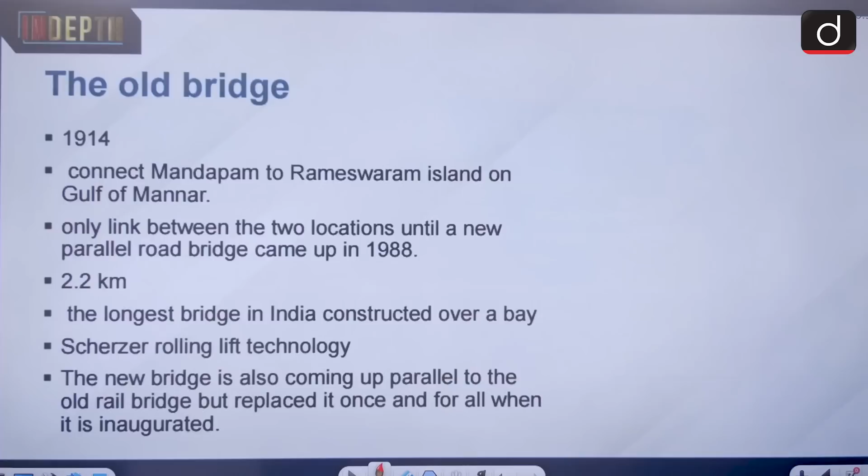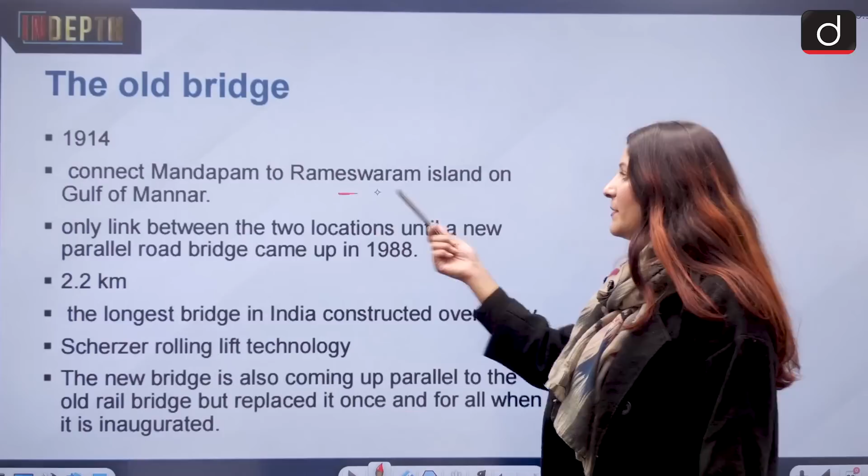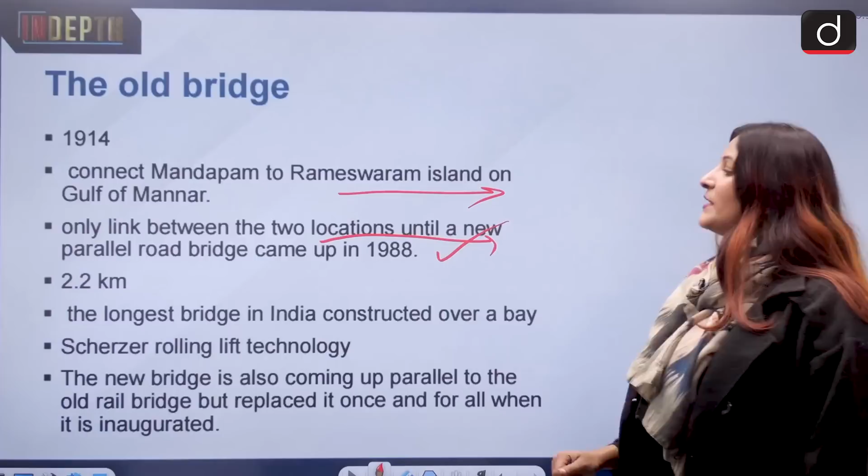The old bridge was established in 1914, so it is more than 100 years old, going to complete 110 years soon. It was constructed by the British to connect Mandapam to Rameswaram Island on the Gulf of Mannar, and it was the only link between the two locations until a new parallel road was built in 1988. It is a 2.2 kilometer long bridge, and it is the longest bridge in India constructed over a bay.

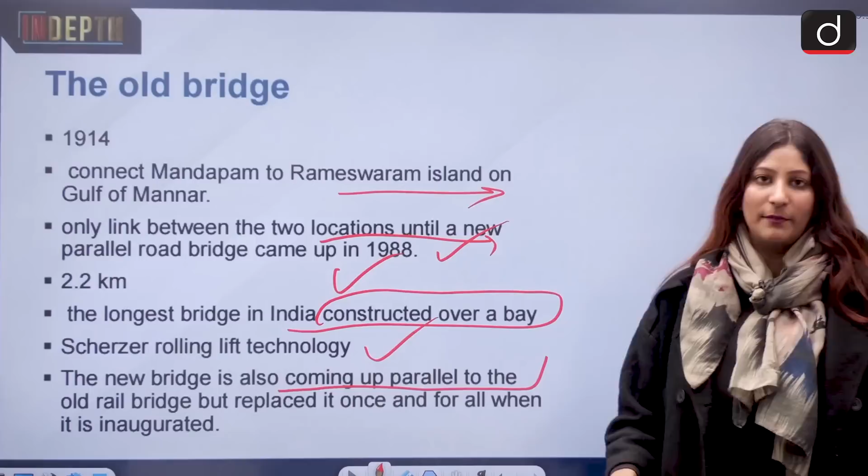So this is a prelims fact. It used to work on the Scherzer rolling lift technology, meaning it used to open up horizontally whenever a vehicle had to pass. The new bridge is also coming up parallel to the old bridge, but once it is fully formed, the old one will be replaced. We do not want any sort of accidents.

This bridge is important because it is India's first vertical lift railway sea bridge. It will move vertically, not horizontally. It works on the electromechanical system, with the mechanics working on electricity, and it will be 2.07 kilometers long.

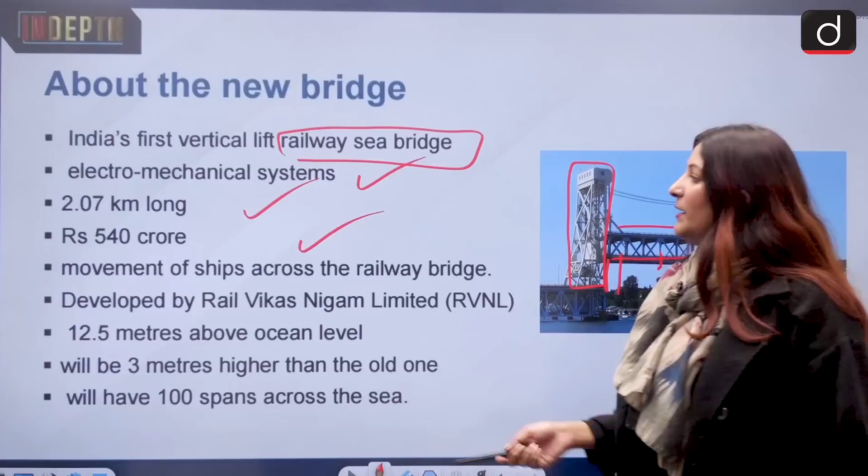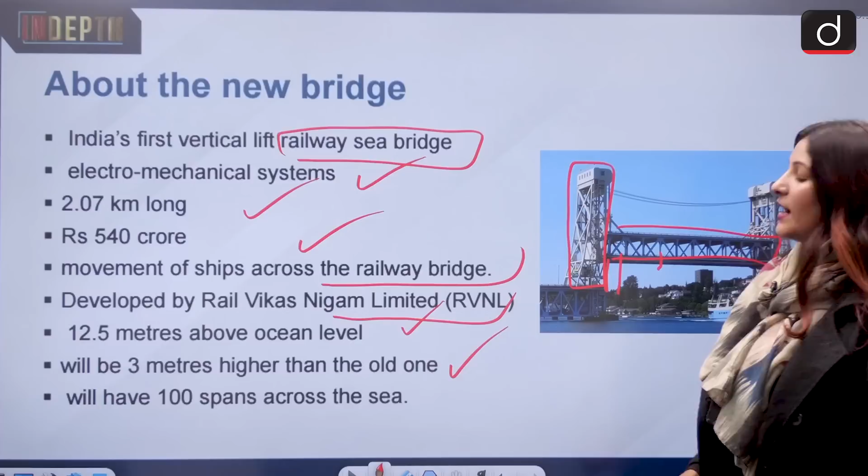The estimated cost was around 250 to 280 crores, but now the cost is 540 crore. The movement of ships will happen across the railway bridge, and it is developed by the Rail Vikas Nigam Limited. It is 12.5 meters above ocean level, 3 meters higher than the older one, and it will have 100 spans across the sea.

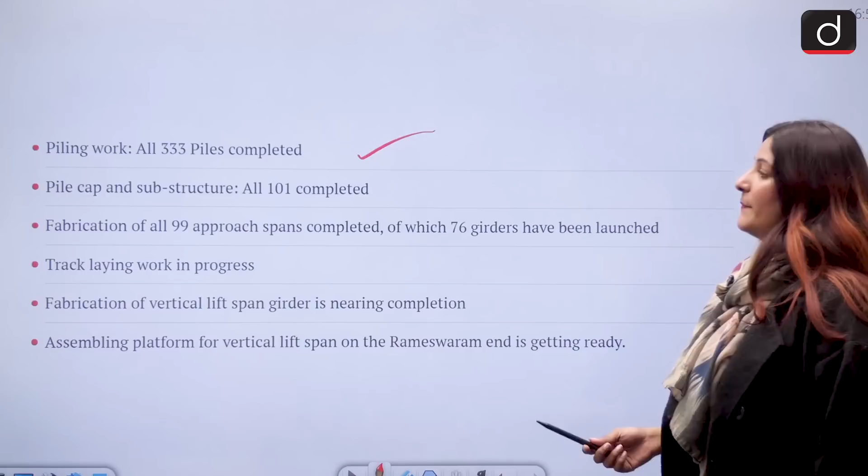Moving ahead, let's see what has been completed. Piling work: all 333 piles have been completed. Pile cap and substructure: all 101 completed. Fabrication of all 99 approach spans has been completed, of which 76 girders are done. This is not important, just understand that 84% of the work has been done.

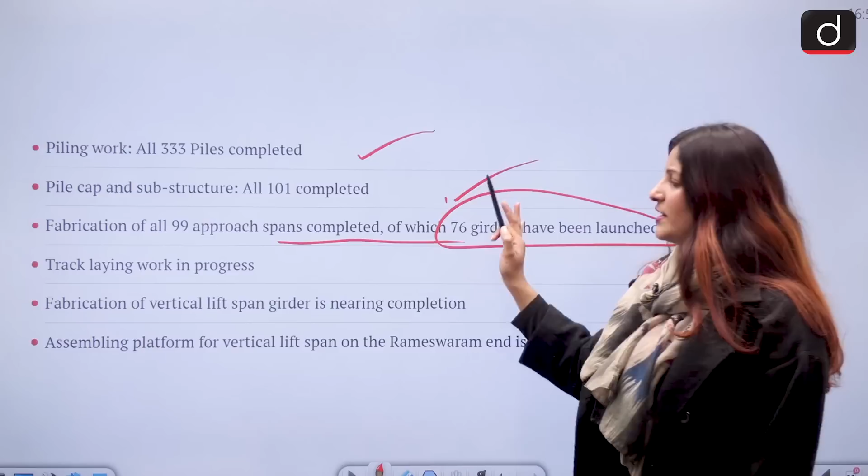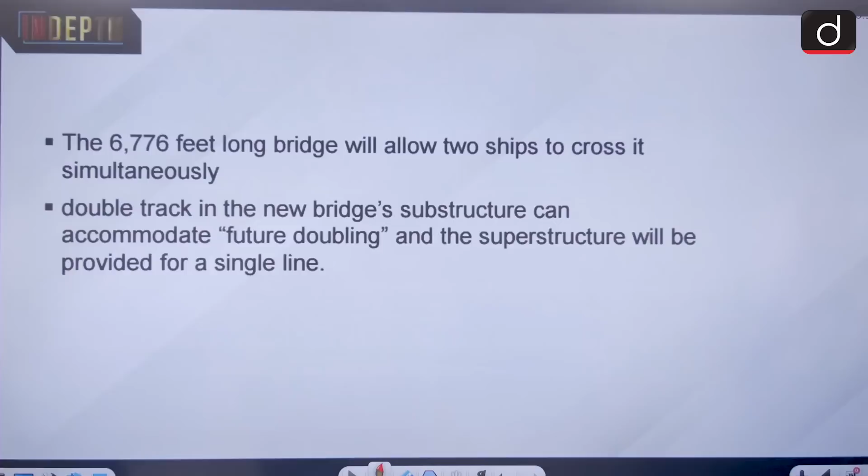Track laying has been done. Fabrication of the vertical lift span girder is also nearing completion, and the assembling platform for vertical lift span on the Rameswaram end is getting ready. This is a 6,776 feet long bridge, and it will allow 2 ships to cross it simultaneously.

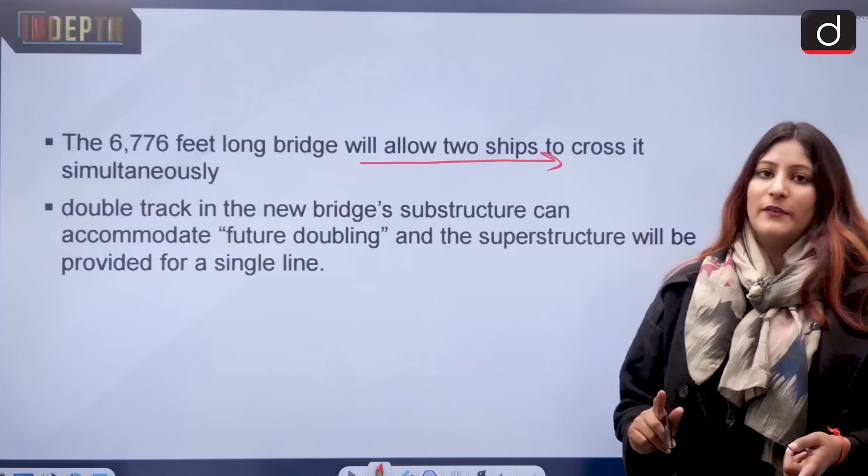So there will not be an issue with respect to trade. Also, the double track in the new bridge substructure can accommodate future doubling, and the superstructure will be provided for a single line. These are prelim statements; it can be asked in a statement form, so remember it like that.

So what is a vertical lift bridge? It uses a system of counterweights and cables to move an interior lift span section, so that it can move up and down easily. Although, remember it remains horizontal - it lifts while staying horizontal.

It will not tilt any other way. It will remain horizontal as it is raised up and down like an elevator. It will allow traffic to pass beneath the structure - once it gets lifted up, the ships will pass through very easily.

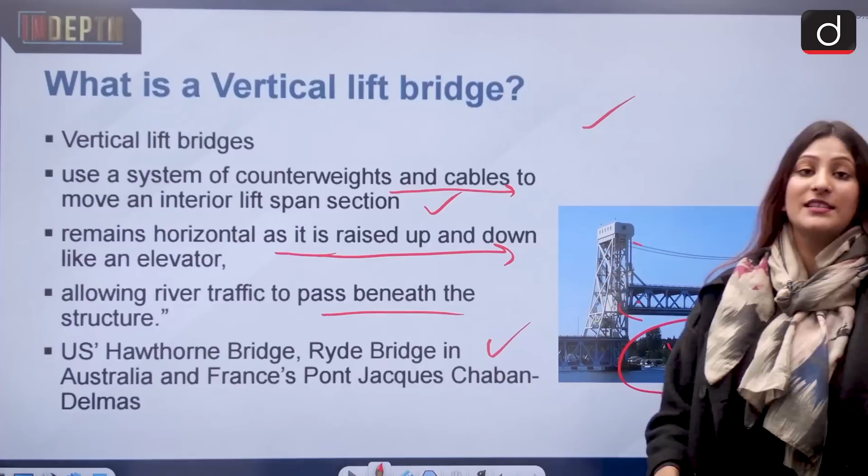So other examples are the US Hawthorne Bridge, the Ryde Bridge in Australia, and the France's Pont Jacques Chaban-Delmas. Remember this.

Tourism is, of course, the most important thing for India along with pilgrimage. Whenever there is connectivity, tourism and pilgrimage will boost. Apart from that, employment for people living across the islands will also be boosted. Looking at China's presence in Sri Lanka, India needs to maintain a presence closer to Sri Lanka - that is also one of the things.